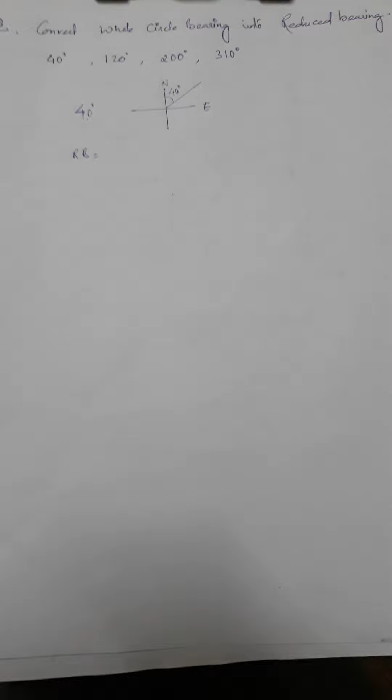Hello viewers, today I am going to tell you about the whole circle bearing, the reduced bearing, and how to convert a whole circle bearing into a reduced bearing and vice versa.

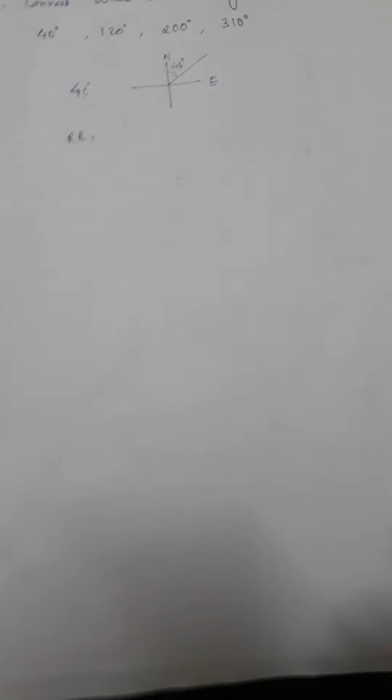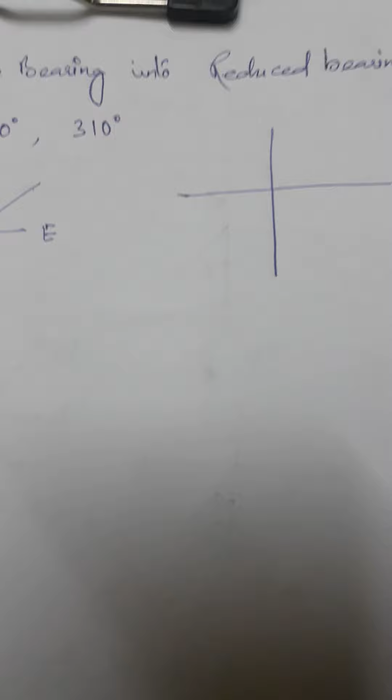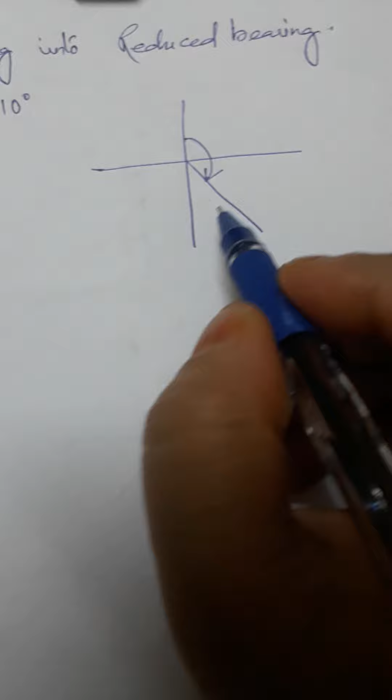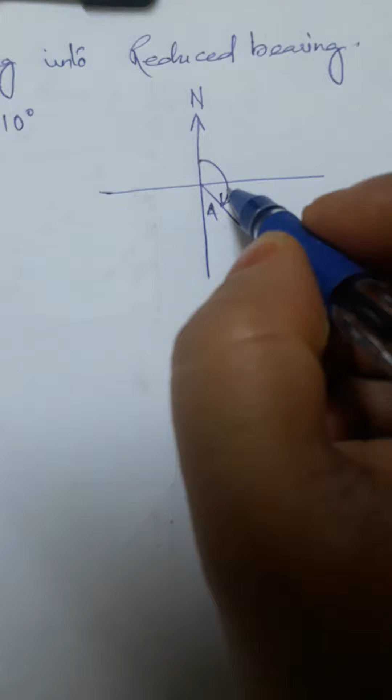Now let us first understand what is whole circle bearing. In whole circle bearing, we find out the alignment of a line with respect to the angle it forms with the north in a clockwise direction. So if this is a line called AB on a given surface, then the angle that this line forms with the north, this is magnetic north, is called the whole circle bearing.

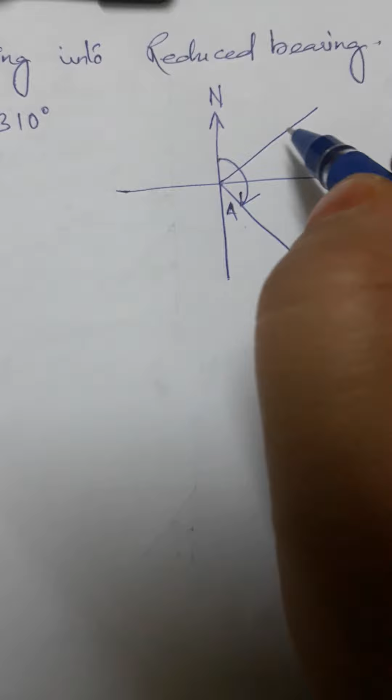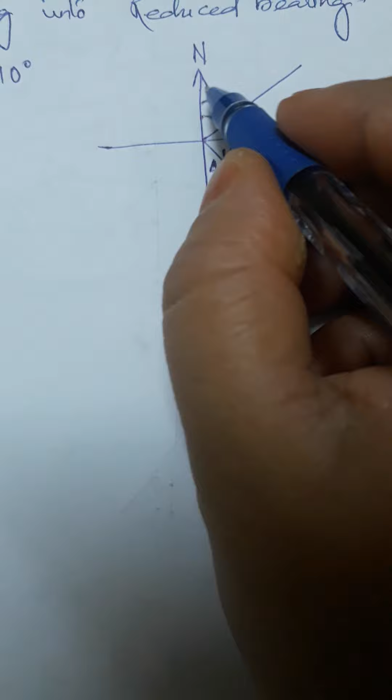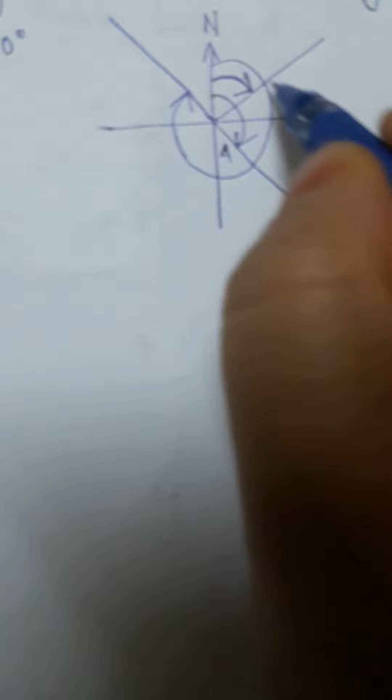Similarly, if there is another line like this, then the angle that this line forms with the north in a clockwise direction is called the whole circle bearing of this particular line. You have to always remember that the angle is calculated or measured from the north and in a clockwise direction. Similarly, if there is another line, we find out the angle it makes with the north in a clockwise direction, and this measurement in degrees is called the whole circle bearing.

Coming to this, since all the angles are measured with respect to north, this whole circle bearing is known as the azimuthal technique. Coming to the other technique, which is the reduced bearing technique.

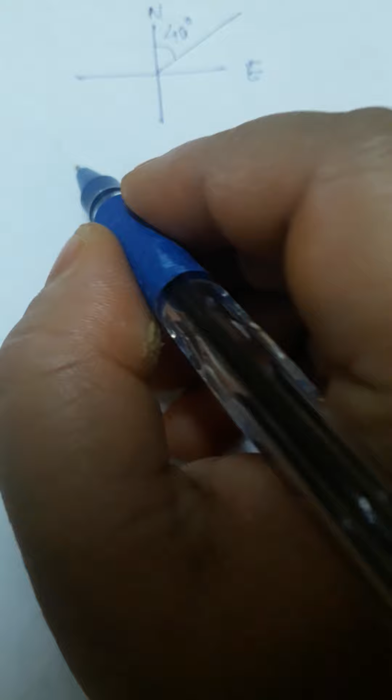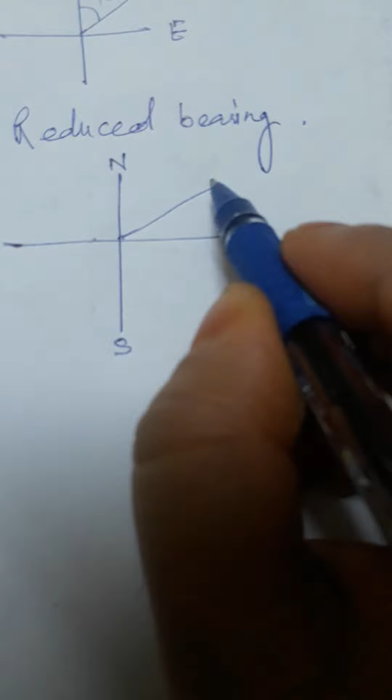Now, in reduced bearing, we find out the alignment of a given line with respect to the meridian passing through that particular area. Meridians are lines running from north to south. So, if there is a line on the surface, the angle that this line makes with the meridian is called the reduced bearing.

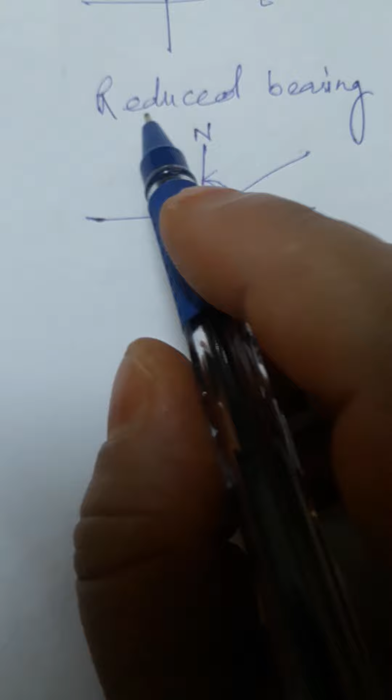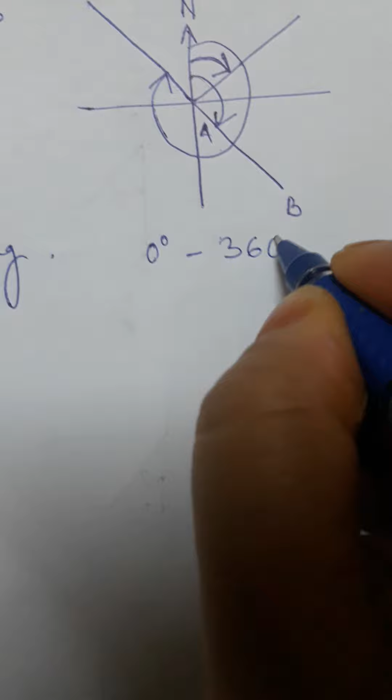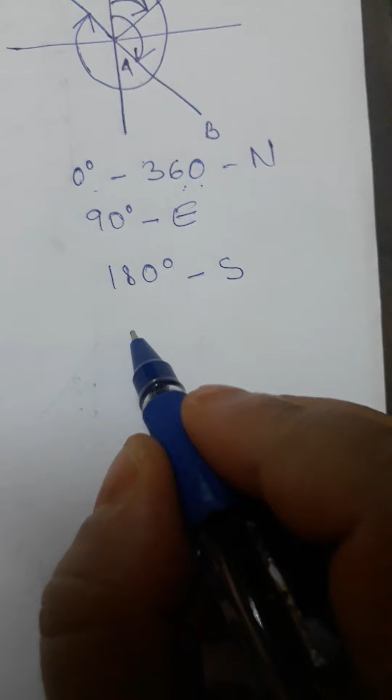Again, in the whole circle bearing, the range of reading ranges from 0 to 360 degrees. Here, north is represented by 0 or 360 degrees. 90 degrees represents east, 180 degrees represents south, 270 degrees represents west. Similarly, north, east, south and west.

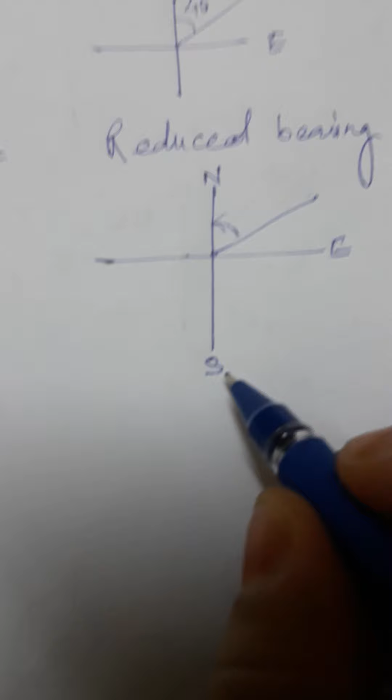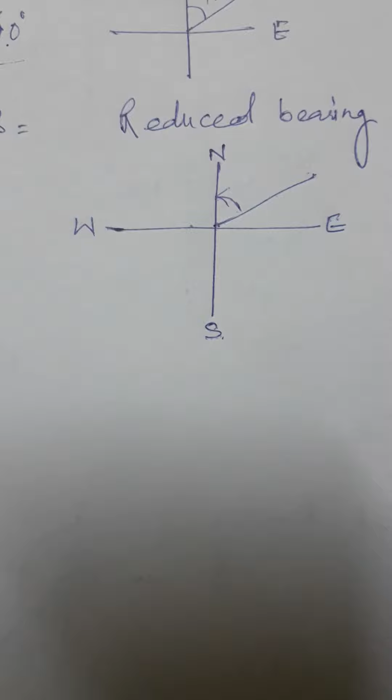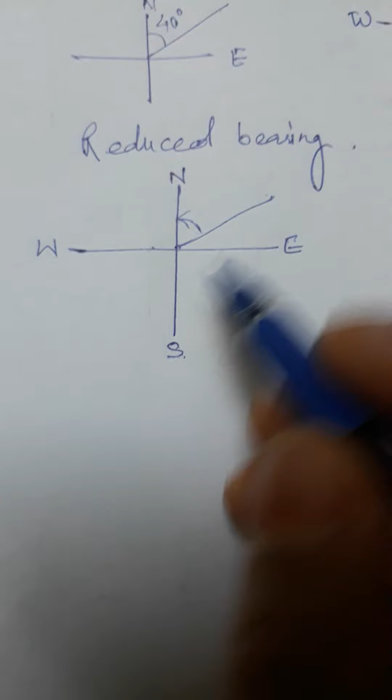Now, in the reduced bearing technique, we use all these four directions, north, east, south and west, to mark four equal divisions of 360 degrees. 360 degrees divided by 4 is 90. So, the whole 360 degrees is divided into 4 equal quadrants in reduced bearing. So, the reading ranges from 0 to 90 degrees in each quadrant.

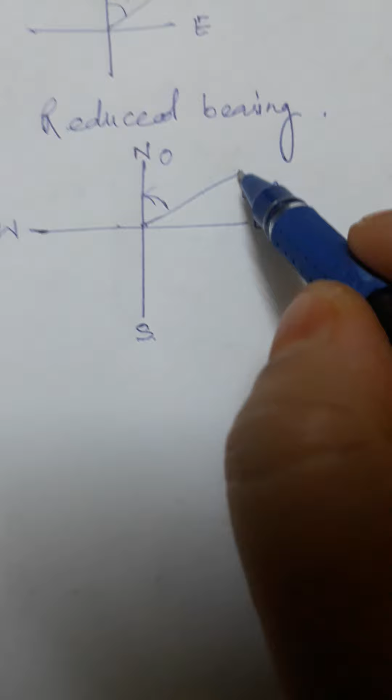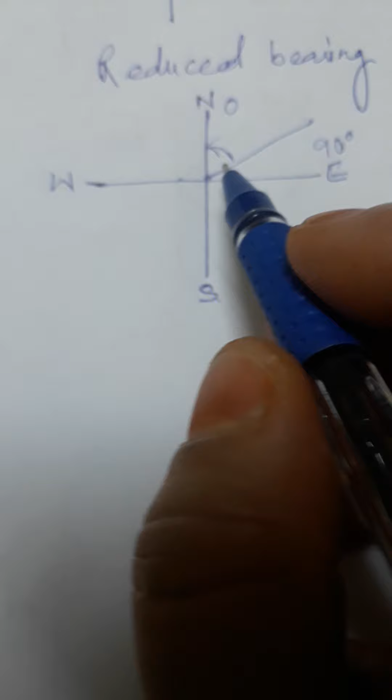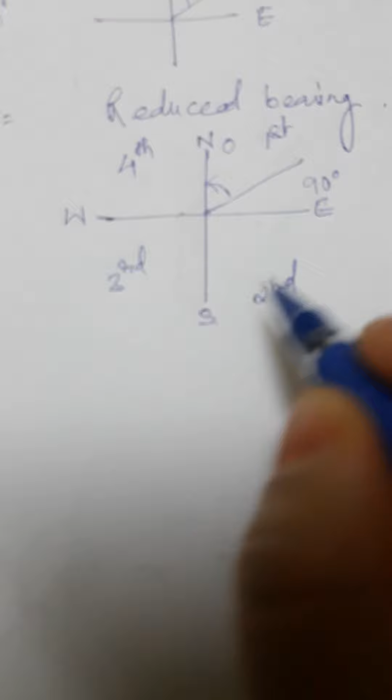So, to determine the alignment of any given line, first we have to state in which quadrant the line is located. There are 4 quadrants, represented as first, second, third, fourth. If the line is in the first quadrant, then we say it is north and east, and the angle it makes with the meridian, let it be theta, we write it in the middle, and the reduced bearing of the line will be north theta east.

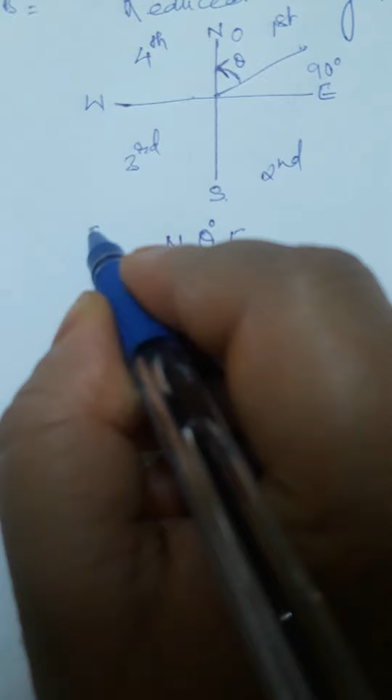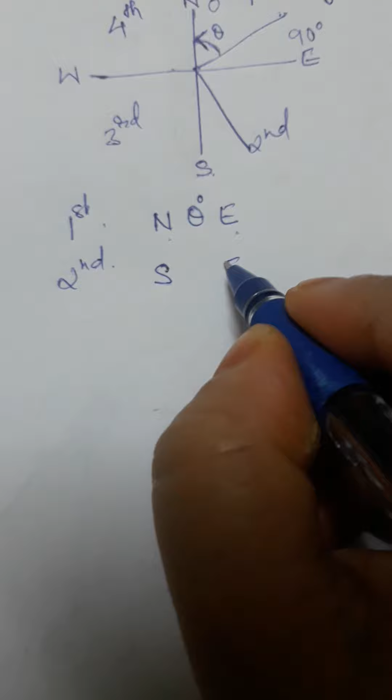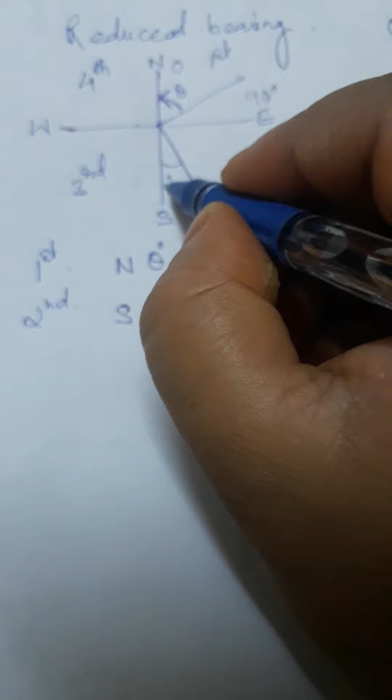This is the case in the first quadrant. Similarly, in the second quadrant, we write the directions first. It is located in the second quadrant as southeast, and the angle it makes with the south, let it be 20 degrees, so you write 20 here.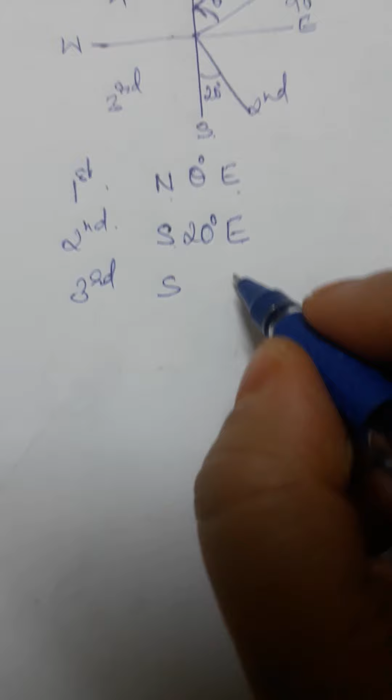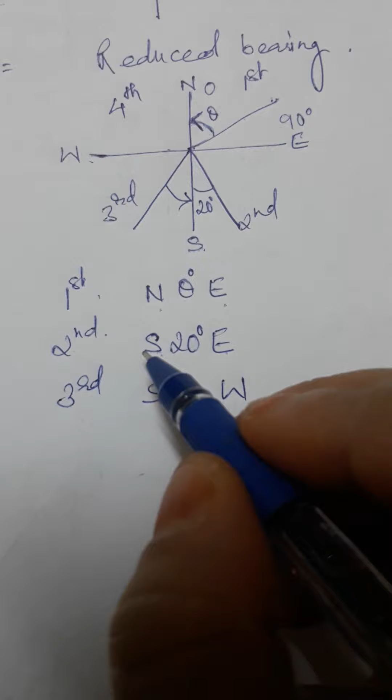Similarly, in the third quadrant, the directions will be represented by south and west. So it is in the third quadrant, let the line run like this, and this is the angle it makes with the meridian, let it be 30 degrees, so it is written here as 30 degrees.

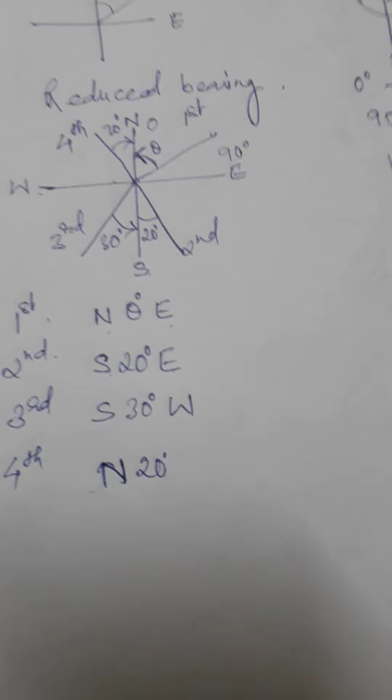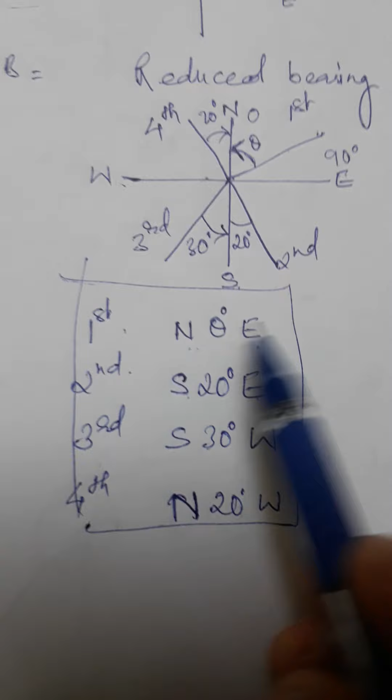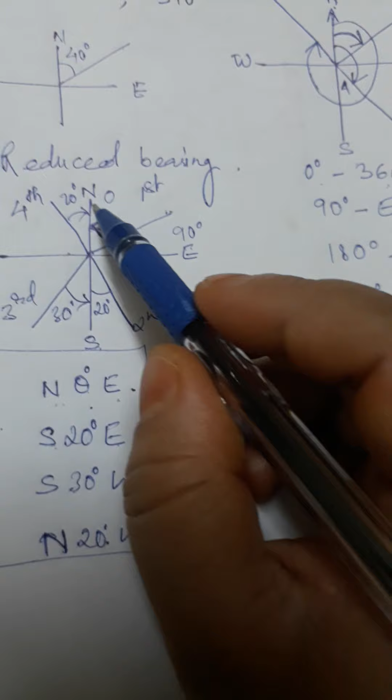Similarly, in the fourth quadrant, it will be written as north 20 degrees, for example if it's 20 degrees, west. So in the reduced bearing technique, we take the help of these directions as well as the degrees that the line makes with the meridian. We always have to take the acute angle that the line makes with the meridian. Again, here the reading will not exceed 90 degrees.

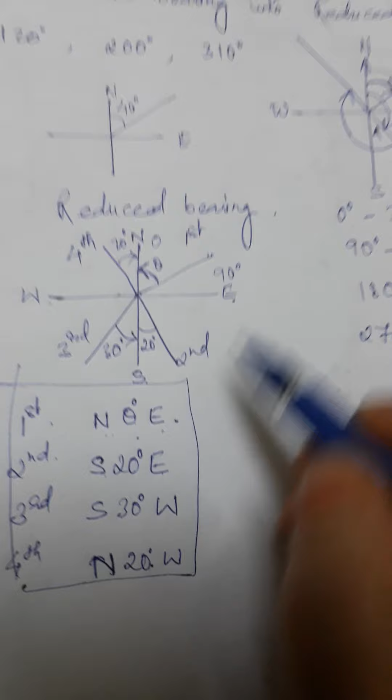Again, north 90 degrees east will represent an east direction. South 90 degrees west will represent a west direction. Similarly, we can do the reduced bearing and the whole circle bearing.

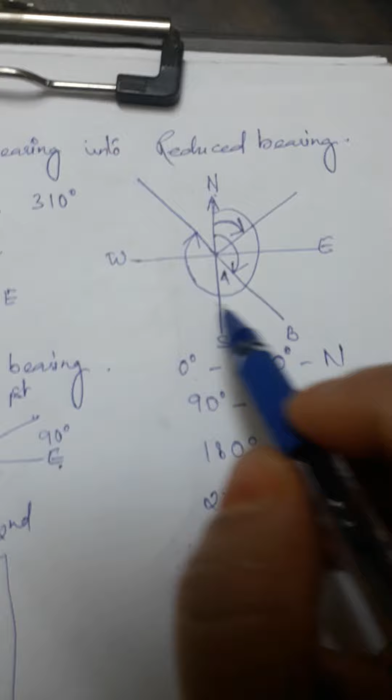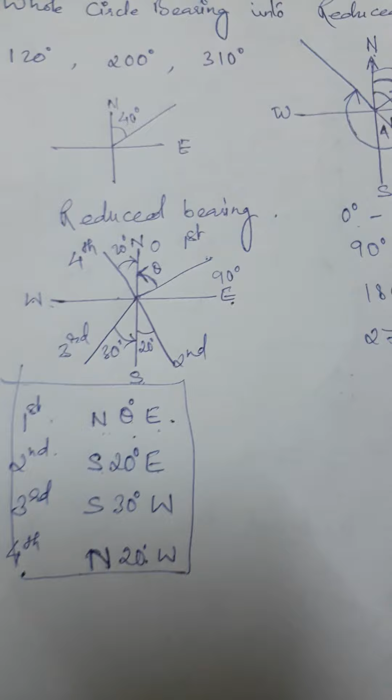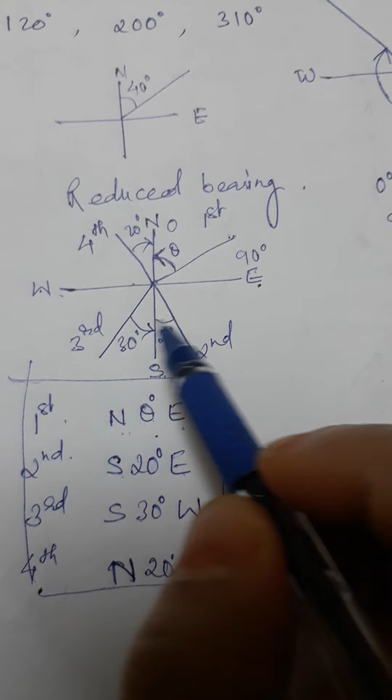Now coming to the conversion of whole circle bearing to reduced bearing, I think we will do this in the next video. For the time being, you should know that in whole circle bearing, readings are measured from the north direction, and in reduced bearing, the alignment of the line is measured with respect to the meridian passing through that area. Here the angle is measured always in a clockwise direction, and here it can happen in both directions, clockwise as well as anti-clockwise.

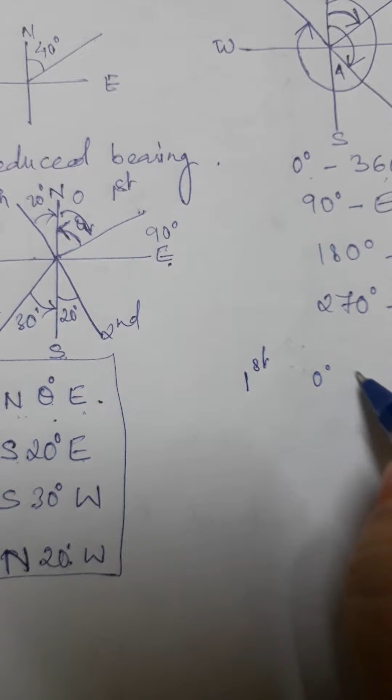And here, for the first quadrant, the whole circle bearing will range from 0 to 90 degrees, and similarly in reduced bearing we write north and east and mark the angles from 0 to 90 degrees.

Similarly, second quadrant, 91 to 180 degrees, south 1 to 90 degrees, east.

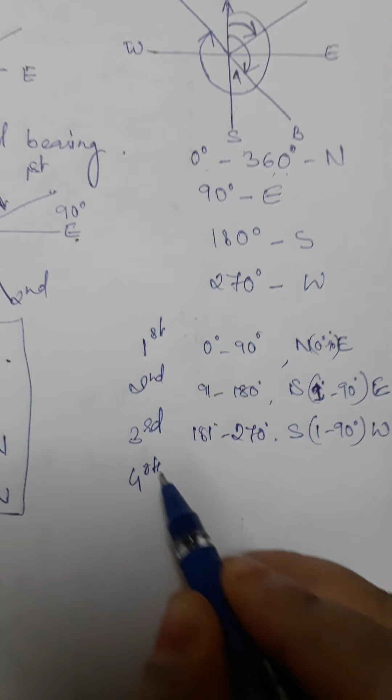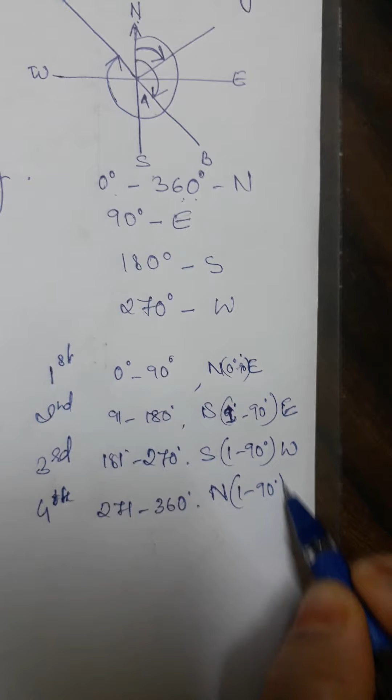Third quadrant, 181 to 270 degrees, it is south 1 to 90, west. Fourth quadrant, 271 to 360 degrees, and it is north 1 to 90, west. This one is the quadrant, this one is the whole circle bearing, and this is the reduced bearing.

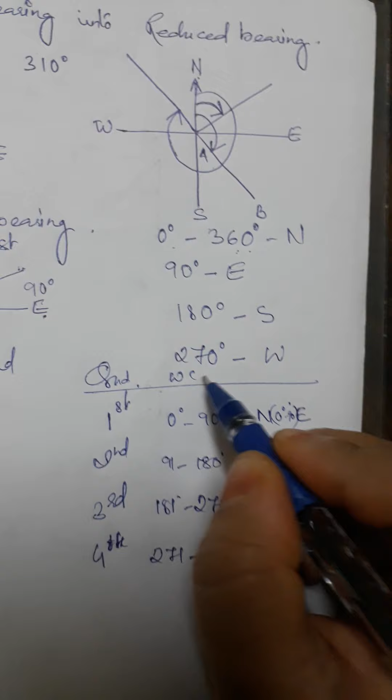This one is the whole circle bearing, and this is the reduced bearing. I think it is clear now. In the next video we will see how to convert reduced bearing into whole circle bearing and vice versa. Thank you.